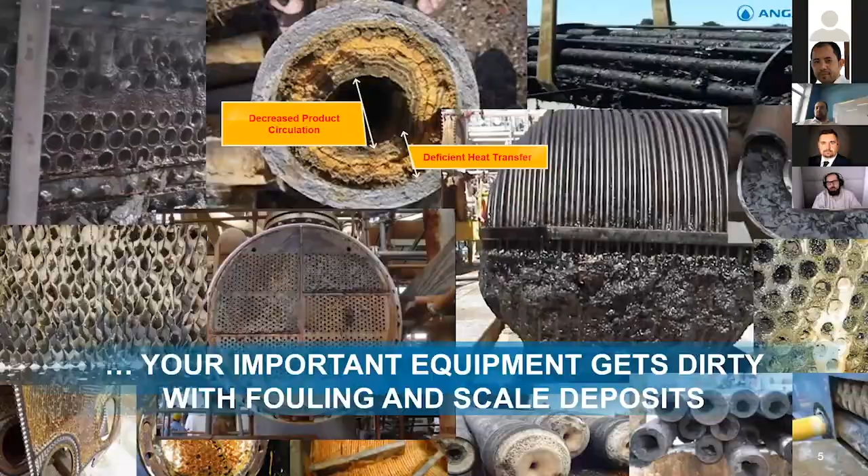So this is the picture most of you are familiar with. All the refineries in the world are suffering from fouling, to different degrees, but we all know that it is a big problem. In ANGARA, we tried to quantify the effects of fouling on the environment and on the economics of the refining and petrochemical business, in terms of what is the effect and what is the cost of fouling across the industry. And then we will walk you through some potential mitigation scenarios which can help you improve and uplift refining margins.

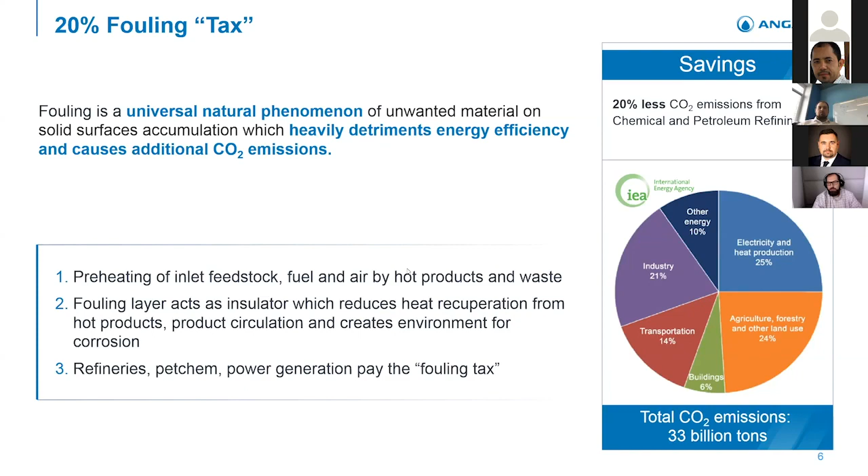From our perspective, fouling is like a tax. Regardless of how much effort you put in, fouling is happening, and everyone pays this cost. So our target is to reduce the 20% fouling in the chemical and petroleum industry to a lower amount. We built quite a large model, and then we cross-matched the model results with the actual numbers in company reports. In the model, we took 3 basic scenarios: 10% dirty, 20% dirty, and 30% dirty, which is very aggressive fouling. And we found that the model works well and fits the company reports.

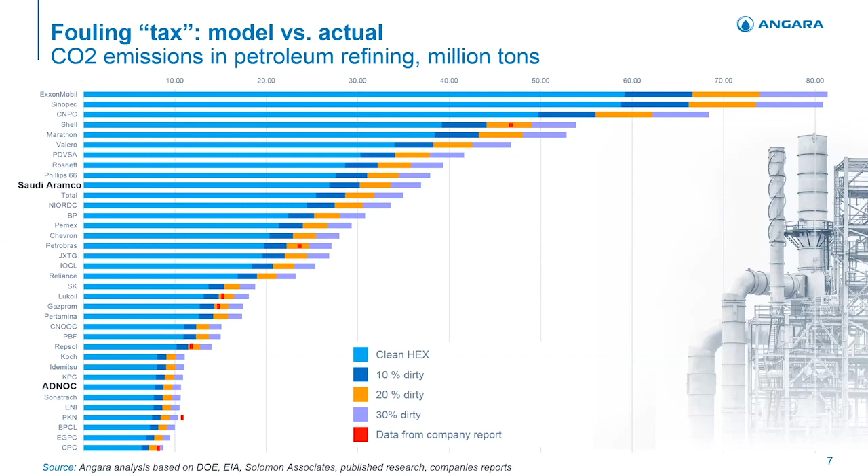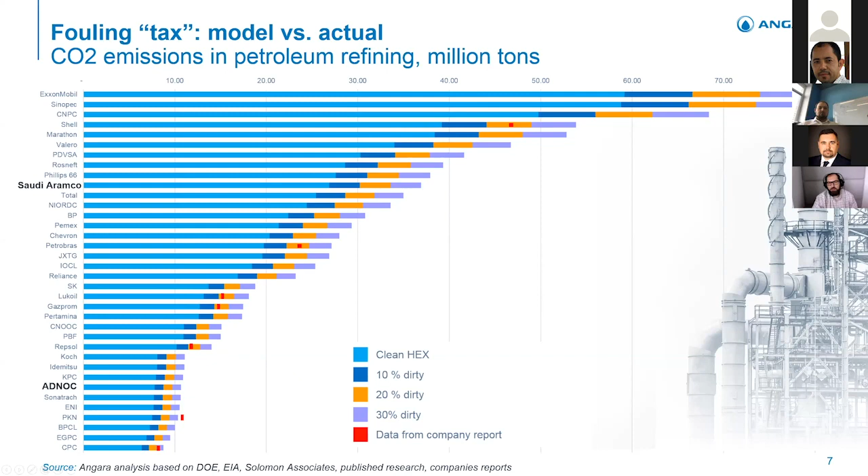The average fouling refiners are facing is up to the 20% dirtiness case. We see this as a dot for Shell. It is about 47.1 million tons of CO2, and in clean conditions, it can be reduced to less than 40 million tons of emissions. And the cost of fouling can be quantified in monetary terms. Jointly, the world industry is losing over $15.8 billion a year in costs of fuel overconsumption due to fouling.

The thicker the fouling layer, the less energy it allows you to recuperate. So you need to burn more fuel in your fired heaters. And by burning fuel, first you spend money, and second you emit CO2. Those are 2 effects which are very negative for the industry. In the case of eliminating fouling, the refining margin can be improved by 30 to 80 cents per barrel, which is quite a significant improvement.

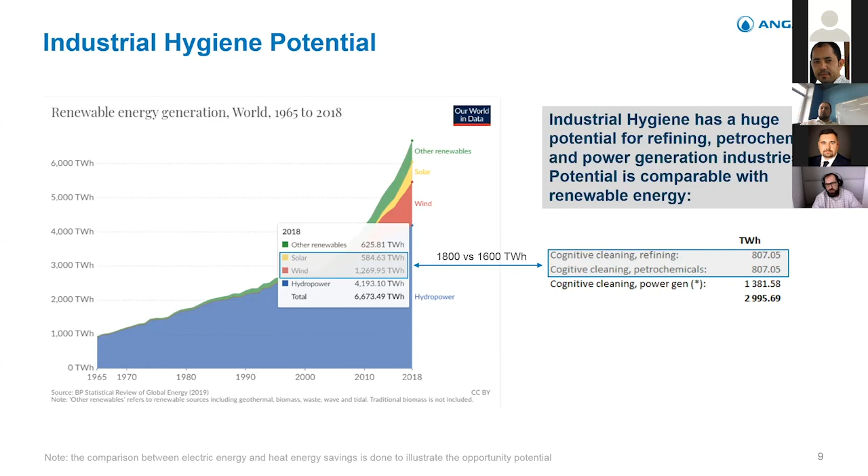Overall, industrial hygiene has a huge potential for the petrochemical, refining and power generation industries. If we look at the refining and petrochemical numbers, it is very much comparable with renewable energy. Jointly, solar and wind generate 1,800 terawatt hours, and the industrial hygiene potential is 1,600 terawatt hours. So it is a very huge potential. This industrial hygiene can contribute significantly to the global climate change goal, let's say 2%. By our estimate, it is like 1/10 of the overall potential improvement toward the Paris Agreement, without any capital investment.

And speaking of the GCC area, we believe that the overall potential of industrial hygiene in the refineries only is slightly above $1 billion a year in potential savings. And if we combine this with the upstream and the petrochemical industry, it could go up to $2.5 billion. That's quite a lot of money.

So now I want to give the floor to my colleague Ilya, our CEO, who will walk you through our core technology, AlfaPEROX, and then we will discuss how we... Thank you, Eduard. I'm happy to speak to you, gentlemen, and present our technology.

So we see great potential. But like any building sits on a foundation, for all our levels of innovation, AlfaPEROX as our core chemical technology is the foundation, which is basically a product innovation and a family of recipes for heat exchanger cleaning. Next slide, please.

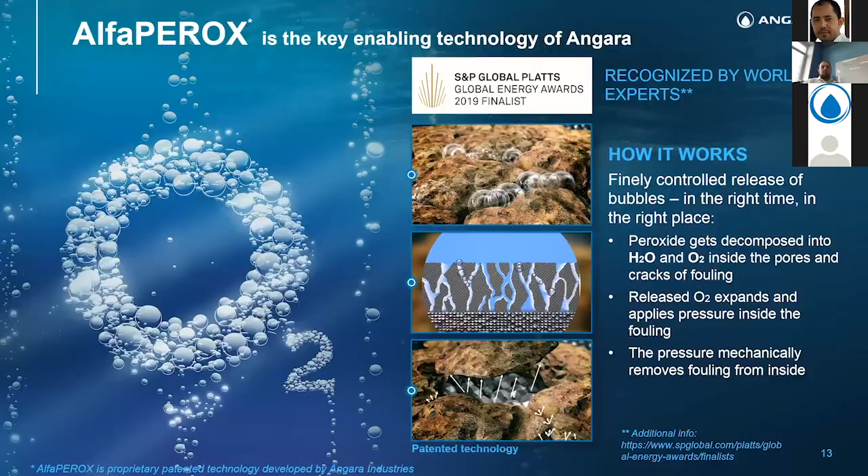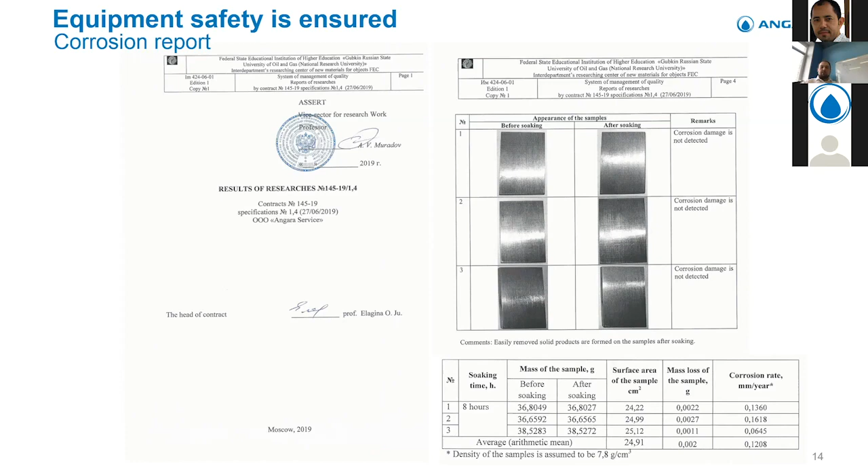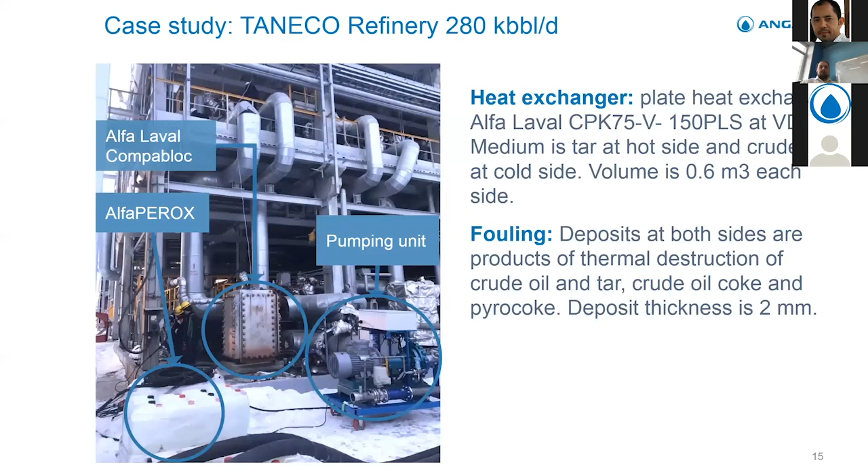The thermal gradient increased from 9 degrees on the hot side, the tar side, to 65 degrees. So imagine how much additional energy is transferred by this heat exchanger, how much non-burned fuel is there, and CO2 emission reduction as well. Of course, we also reduce the pressure gradient after cleaning, which also allows us to save on the power required to pump the tar and oil through the heat exchanger. Next slide, please.

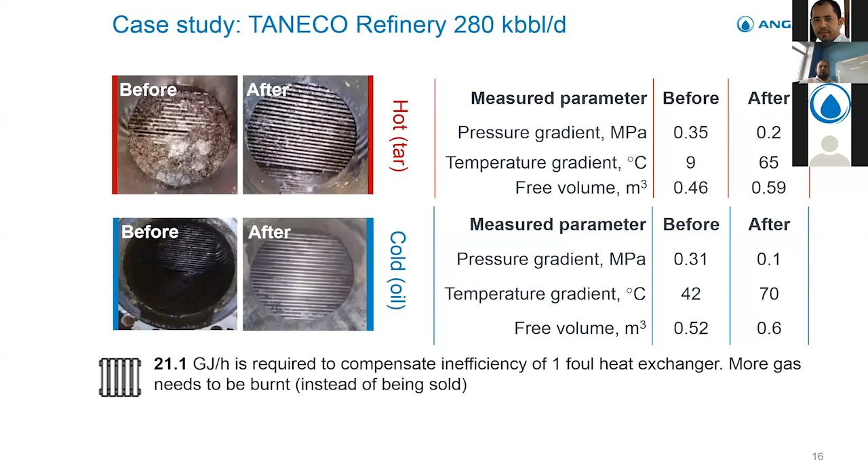This is another example from Moscow refinery, from Gazprom Neft. We did the cleaning of a butane cooler. So you can see that the unit itself is above ground, 16 meters, and we placed our equipment on the ground level. What is interesting about our equipment is that it's standard equipment for chemical cleaning. So that means that we can use local service providers in GCC to provide our technology to clean heat exchangers.

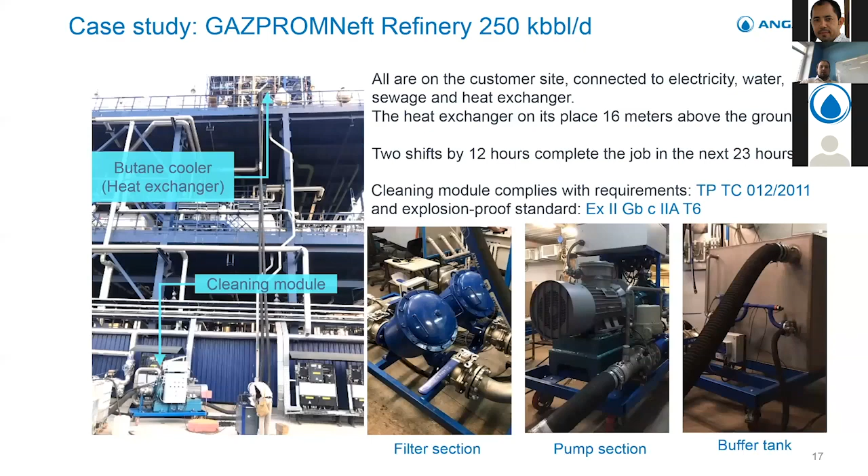Here's the economics behind this cleaning, and these numbers are not our calculation. These numbers are confirmed by the refinery. So this unit cools butane to dissolve it in the gasoline line. And each day the unit is offline costs the refinery about $60,000 US. So only because of a downtime reduction from 72 to 23 hours, AlfaPEROX cleaning saved the refinery about $90,000 US per one unit per one cleaning.

But if you look into the table on the left side, you can see that before cleaning, the thermal gradient was less than 1 degree. That means that this heat exchanger didn't work for some time, maybe several weeks or some months. That means that a significant portion of this $60,000 US the refinery lost during all this period. And after the cleaning, the thermal gradient became almost 40 degrees.

But imagine if there would be a system in place which calculates the perfect moment for the cleaning and does it without human interaction and does it all the time. So in this case, the system could prevent such a bad situation with this bad thermal gradient.

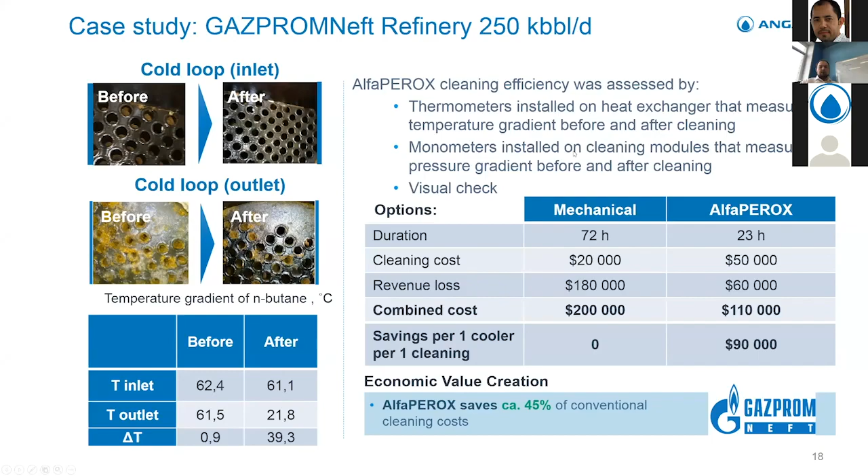So basically, here we are coming to the next level of innovation, the cognitive cleaning, which is based on the core chemical technology, AlfaPEROX. And basically, cognitive cleaning is a process innovation, which is a fusion of seamlessly integrated AlfaPEROX as a chemical solution and smart scheduled maintenance as a digital solution. I invite Eduard to come back here, please.

Thank you, Ilya. So far we've discussed fouling and its effect overall on the environment and on refinery costs. We've also discussed AlfaPEROX, which is a chemical which has the potential to remove the fouling, replacing the need for mechanical labor. So it can be done without disassembly. But the problem here is that fouling is very different from one heat exchanger to another. And therefore, the cleaning solution and cleaning recipe should be tailored to each individual heat exchanger.

Therefore, we developed a technology called cognitive cleaning. Cognitive means that we do it in a closed loop. So we collect the data throughout the entire process of cleaning. We do machine learning and physical analysis of the recipe, of the samples, and we integrate the knowledge into the next cleaning. So overall, cognitive cleaning has three components. The first one is a smart recipe. Basically, we need to understand the fouling and come up with the right solution and the right timing, how long we should treat the fouling with different components of our solution.

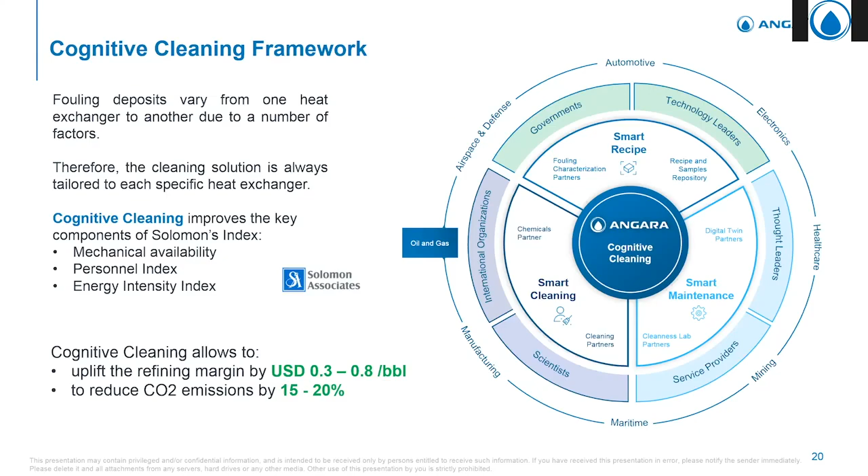The relative heat transfer efficiency degrades over time. It is not a linear process. It depends on the flow and on the specific fluids. But since the industry's inception, engineers started to build bigger heat exchangers to accommodate the fouling deposits in the heat exchangers. And the problem with this approach is that the average efficiency level is very low.

With the cognitive cleaning, we can do very quick turnarounds, very quick cleanings, non-disassembly, no need to remove the heat exchanger from where it is placed. And with that, we increase the average efficiency level by far. And it has a dual effect. First, it brings a higher margin, and then it allows to cut the CO2 emissions. And this is just only one way to get benefits from the cognitive cleaning.

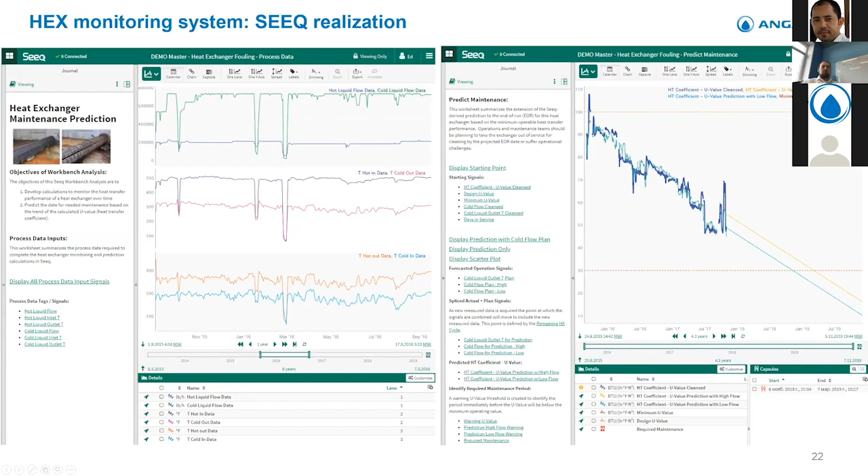This is one of the implementations of the heat exchanger monitoring system based on SEEQ, a very popular tool. And here you may integrate all the available sensor data which you have for the heat exchangers on the flow, on the temperature, on the pressure of the fluids, and you can calculate the overall heat transfer coefficient, make some predictions on the analysis of this data, schedule the cleaning and also control the entire process as you want. And that was how to implement these smart chemicals on the enterprise level.

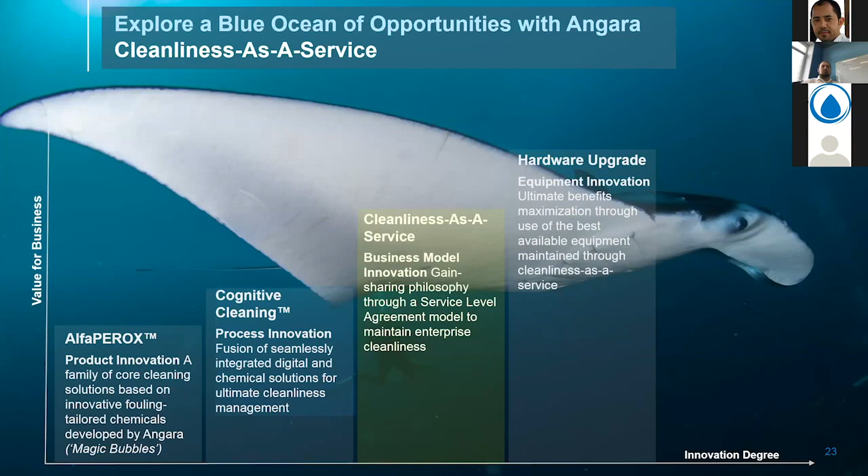The next level of our solution is more of a business innovation, business process. It is based on a new philosophy, which might be very familiar to you already with the water providers and the electricity providers, probably with some IT providers. It is based on the concept of service level agreement. So instead of being responsible for the cleaning by yourselves, or having the traditional approach when the contractor and customer have different targets, one wants to increase costs, another wants to decrease costs,

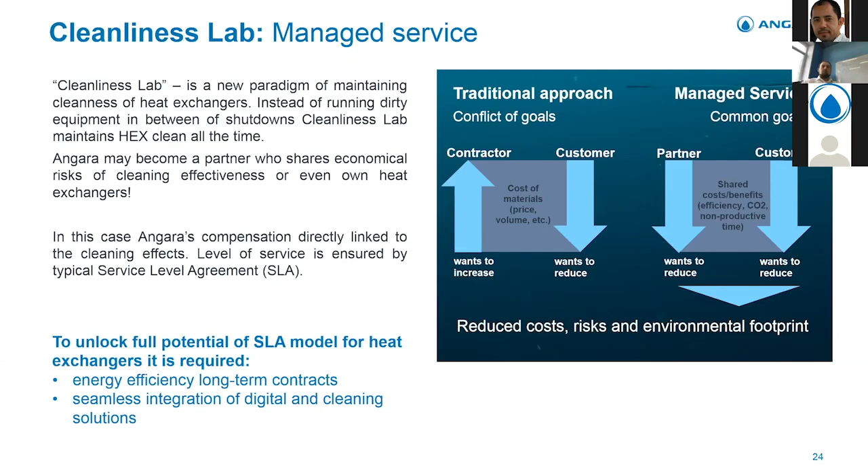we designed the Cleanliness Lab, which allows to implement the benefit sharing approach: the higher the savings, the bigger the overall payment made to the partner. And this is how it works. This approach allows you to de-risk the cleaning process, and we basically share the risk of the implementation of our technology, and it also allows to unlock the value of the SLA model for the heat exchangers, transfer it to an energy efficient long-term contract, and seamlessly integrate your digital and cleaning solution into one overall approach.

And I will accelerate now. This is a very important subject we are approaching. Why are we doing this? You already know very well that there are very efficient heat exchangers in the industry, plate heat exchangers, but their implementation is very, very rare because there are certain problems to maintain the equipment.

And some companies, like our customer here, tried to replace the entire preheat train from shell and tube to plate heat exchangers. So they bought 26 new heat exchangers from Nexson, and they achieved great results, the performance I can describe on the next slide, but they also faced unprecedented challenges to maintain this equipment because the traditional approach, mechanical hydrojetting, was not really helpful to clean this equipment. So they came to us asking to clean those heat exchangers.

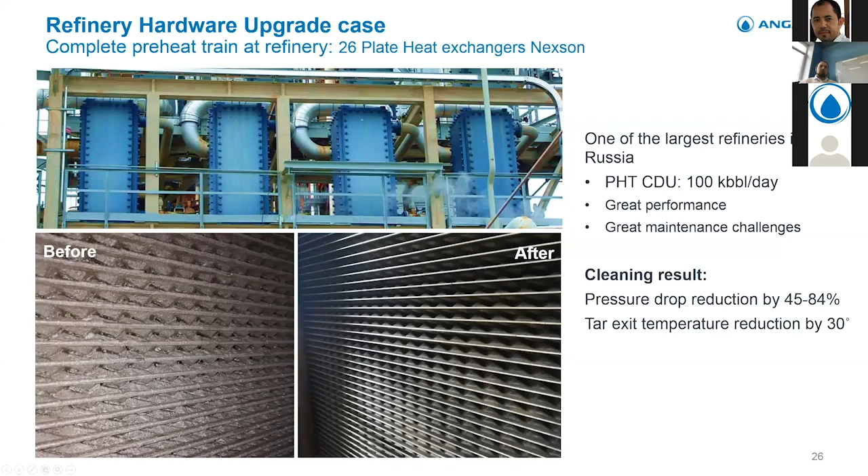And it is very interesting because it unlocks the barrier for the industry to implement new equipment, to implement plate heat exchangers in existing refineries and achieve even higher levels of efficiency beyond the ones you've already seen with switching to clean and hygiene. So it is a combination of modern hardware and a clean-as-you-go service model, which in this case empowered over 42% fuel reduction and associated CO2 reduction. Basically, the refinery saved over 130,000 tons CO2 per year from this implementation.